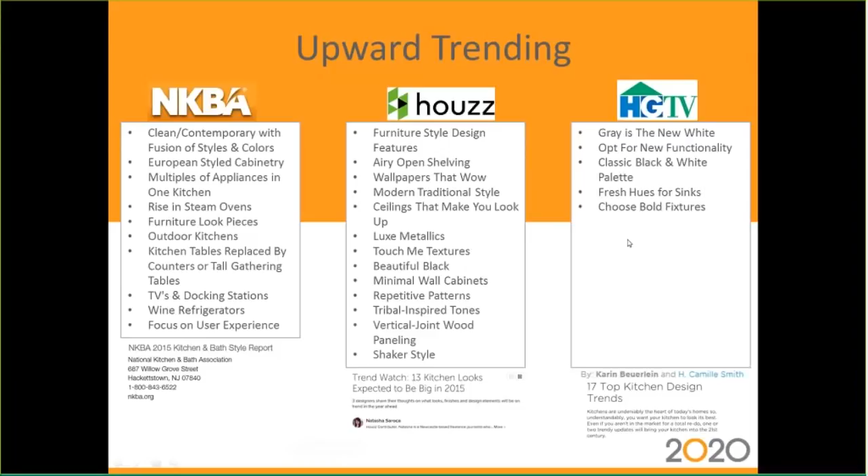Choose bold fixtures, contrasting light and shadow — we're going to talk more about lighting later. Maximizing storage, again talking about inserts inside of cabinetry. Add in automation, and that could be automation from everything from a soft close or an automatic open to automation within your appliances. Again, appliances going to commercial grade, bigger, more commercial type of appliances.

Here's one of my favorites, quartz. When we go back to the NKBA survey, there's actually only one type of countertop even listed anymore in growth, and it's quartz. I mean, it's just blowing everything out when it comes to growth. Mixing countertops, wood, quartz, and so forth.

And then a couple of other flairs they have: timeless farmhouse flair, contemporary combo, which simply means a contemporary kitchen and maybe an old warehouse with a brick wall, having a flexible palette, and opting for architectural lines. We'll get into all of these later as we start to see what's alike within the trends.

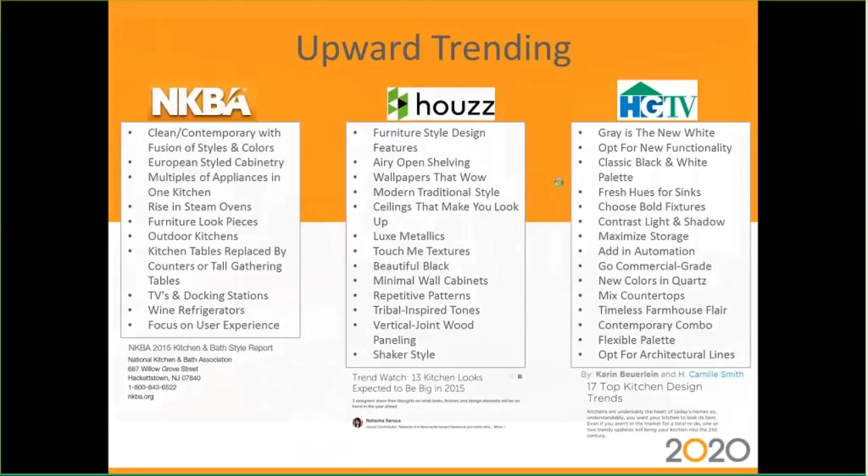So that's a great comparison of industry experts, a combination of industry experts and consumers, and what the consumers are actually seeing. So let's move on to the first topic, which I want to talk really about designing and selling with the trends. Now, when we move into designing and selling with the trends, let's take a look at what's alike within our surveys. So the first thing I want to focus on is colors.

Here's Houzz: black is beautiful. Tribal-inspired tones — and you'll see the earth tone that I was talking about just a moment ago behind our very contemporary white kitchen.

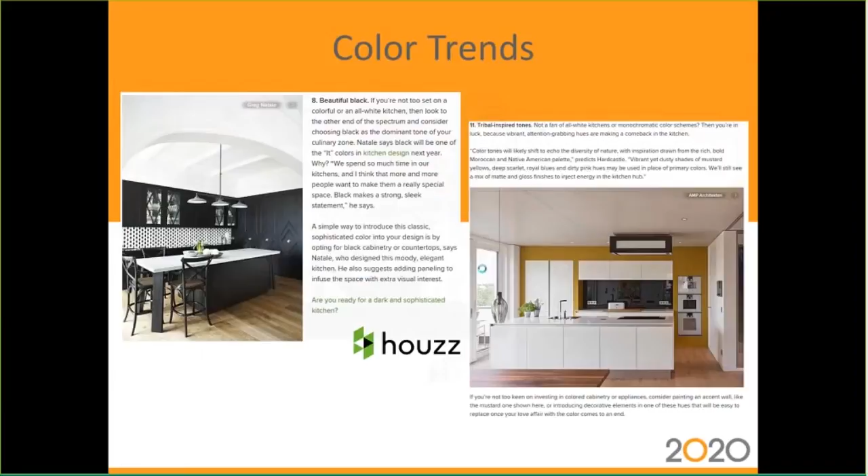Even if you take a look at HGTV, what are they talking about? Gray is the new white, and classic black and white palettes. Well, how do we show that to our client? Because our client is seeing this, we're recommending it. How do we actually demonstrate that? Let me show you a couple ways to do this that are pretty interesting today.

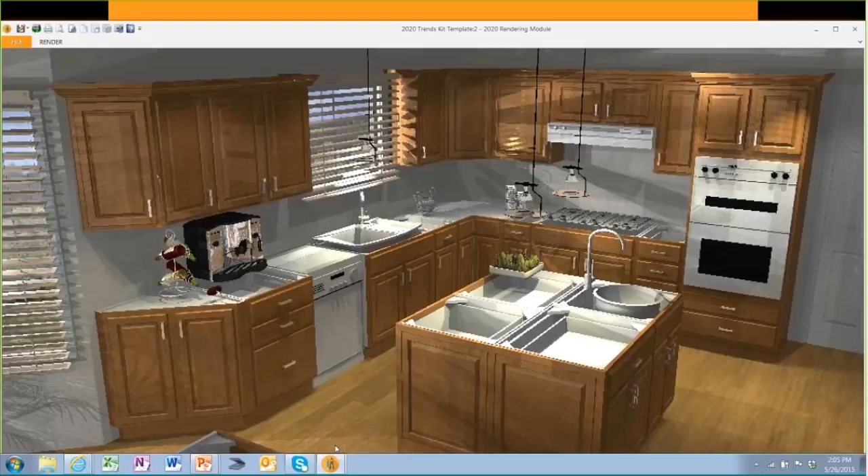Number one, I have a kitchen. It's a very, very traditional looking kitchen right now, as you'll see. It's starting to render, going through the steps. Usually it takes about 20 seconds to fully render this. But I want you to notice it's just a plain old cherry with a medium stain. This could be anybody's 1995 kitchen.

So let me flip up here. Let's go into my plan, and let's talk a little bit about some of the capabilities that we have today. First of all, let's say that our manufacturer uses Sherwin-Williams, and we want to paint the kitchen a Sherwin-Williams gray.

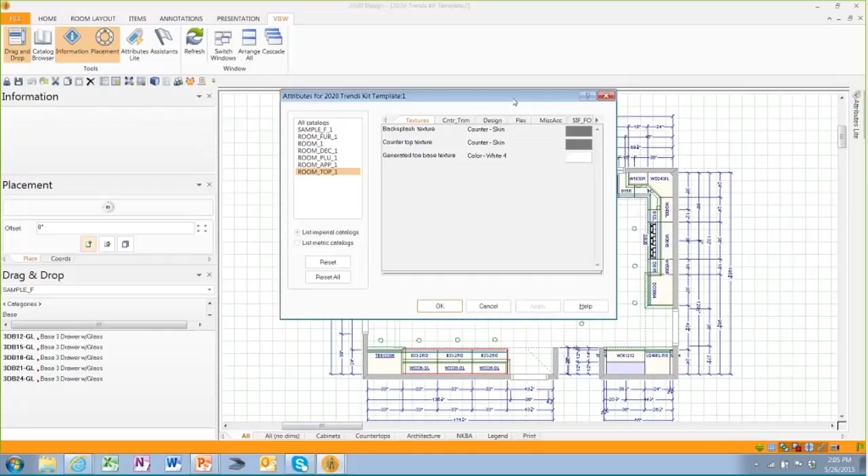All we have to do today is right-click on the plan and go to what's called Global Attributes. Now, what you're watching right now—we may have 2020 users online with us, we may have non-2020 users. All are welcome, we're trying to provide trends to the entire community. For those of you that are 2020 users, I am using V11, the latest update. For those of you that are not 2020 users, just follow along with me and you'll see the capabilities and maybe some items that can help you in your business.

So once I enter into the global attributes, which means change everything, I'm going to go into Sample F Catalog, which is the cabinet manufacturer I happen to use, and pick one of the wood tones—let's just say the molding texture. When I click on that texture, you'll see it'll give me my molding texture, and it's wood. If I scroll up in my list, I'll come back and say let's use paint instead. I'd like to use Sherwin-Williams, and I'd like to use a cool neutral, because whites and grays and so forth are really popular.

We have Sherwin-Williams, agreeable gray, amazing gray, analytical gray. I can change further down in the alphabet and choose cyberspace, as black, or Chelsea gray, or whatever it's going to be. I'm going to come up here.

There's one that I like to use, which is aloof gray. I'm going to click on aloof gray, and let me, for you 2020 users, teach you a little trick. When I want to change multiple items to be the same color, I simply highlight the color code at the bottom, and on my keyboard hit Control-C. That copies everything. I'm going to paste that into some other areas in just a moment.

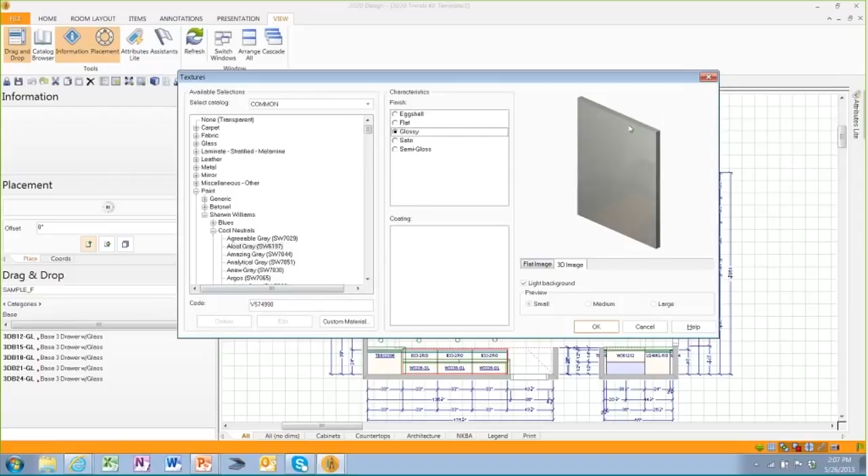So when we really do move into those modern colors—you are working on a slab door, it is a Ferrari red color, and you need it to be glossy. That's the downtown kitchen you're working on right now. You can click on glossy, and it will be really glossy. It will actually reflect everything else in the room just like it would in real life.

Now, I'm not quite going that modern, so I'm just going to go back to flat gray. We'll go ahead and click OK, aloof gray, and you'll see that this has changed to aloof gray.

If I want to take my other wood tones and make them aloof gray, all I do is highlight them and hit Control-C, and that becomes aloof gray. Let me do that again—I did the wrong thing. Let me go back up here and get my paint again. I said Control-C, but I meant to hit Control-V, so just bear with me one second.

We'll go back into Sherwin-Williams, back into our cool colors, aloof gray, and I will copy that one. There we go, and now I'm back on track. So we'll go back in here, and I'll say Control-V, which is paste. And then I'll choose Control-V again, which is paste.

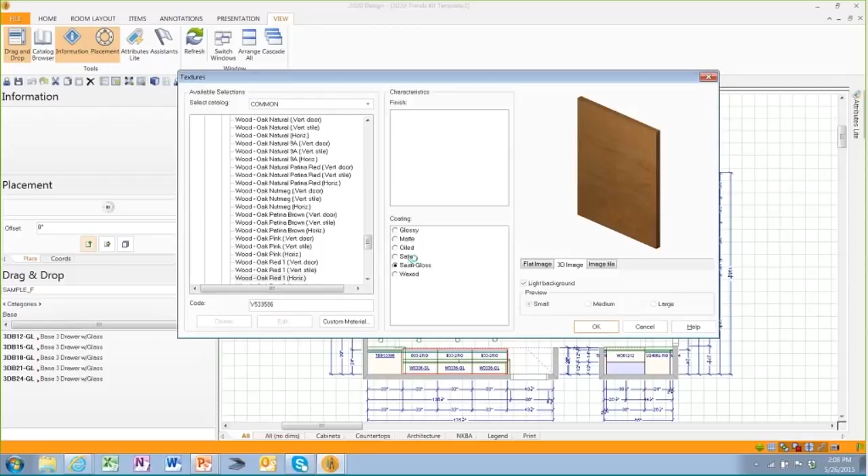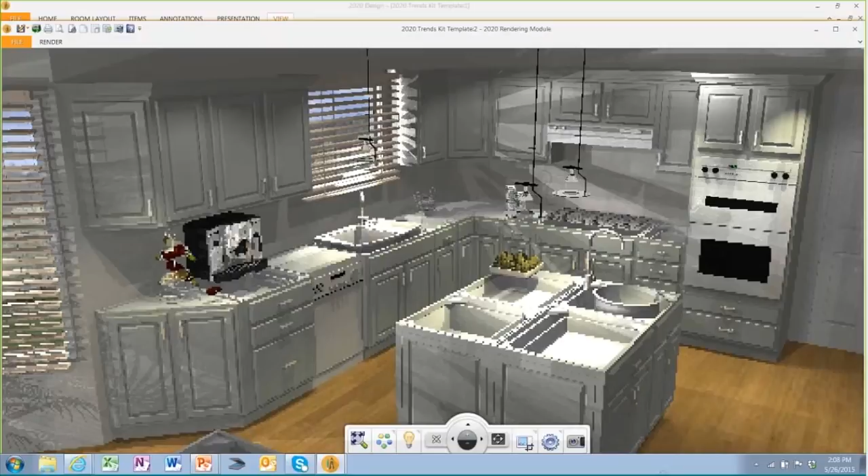One more time, I'll hit Control-V to paste. Now let's take a look at our kitchen. Remember that 1995 cherry mid-tone kitchen I showed you a moment ago? As it starts to draw, it's now gray - and not just gray, it's Sherwin-Williams Aloof Gray.

As I scroll in close, let's look over top of my artichokes. I'll highlight this one area and watch as it changes and paints my kitchen. By the way, you might notice I have levitating artichokes and a sink hovering above where my countertop should be. We'll place countertops in a little while, so just be aware they're purposely levitating right now.

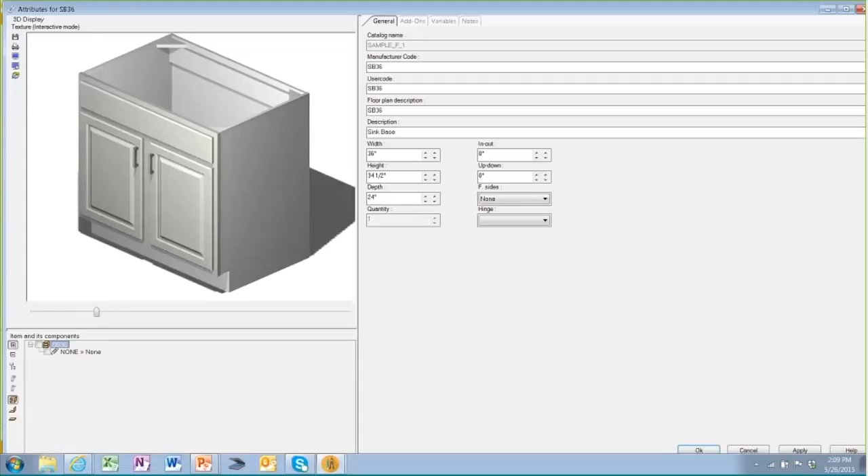So there's my Aloof Gray. Let's say you wanted to incorporate black - remember we said black is one of the fastest growing colors? I can zoom in here and say, let's take this sink base 36. We'll double click on it, and I don't want the sink base to be gray - I want it to be Black Magic, a color by Sherwin-Williams.

I'll go into variables and click on texture - and when I click on texture, I hit the wrong button. We'll hit texture, I'll say door texture. I'd like this to be... give me just a second, I can hear my speaker is on, let's silence that so you don't hear the beep.

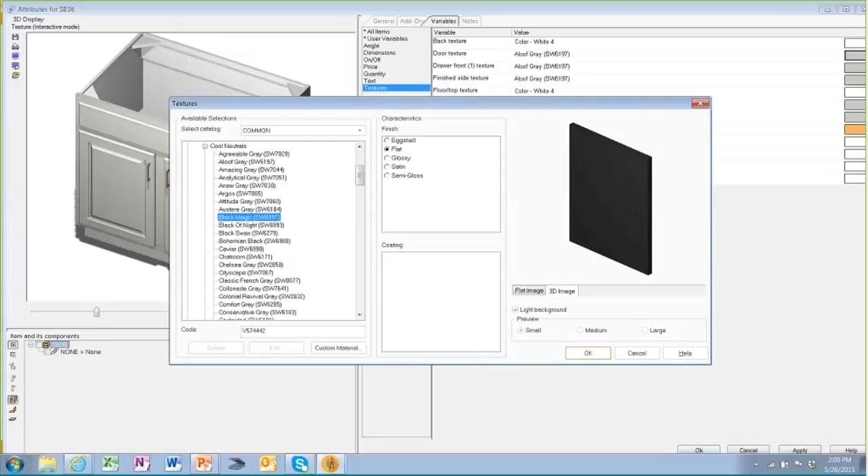So we'll come down here, say Black Magic, click OK. I can go through and pick the next one and say I want that to be Black Magic too. Again, for the shortcut, I just highlight it, hit Control-C to copy. We'll come back down and choose the last one, highlight the color code, hit Control-V which takes me right to Black Magic, and click OK. Maybe I even want to make the end panels Black Magic.

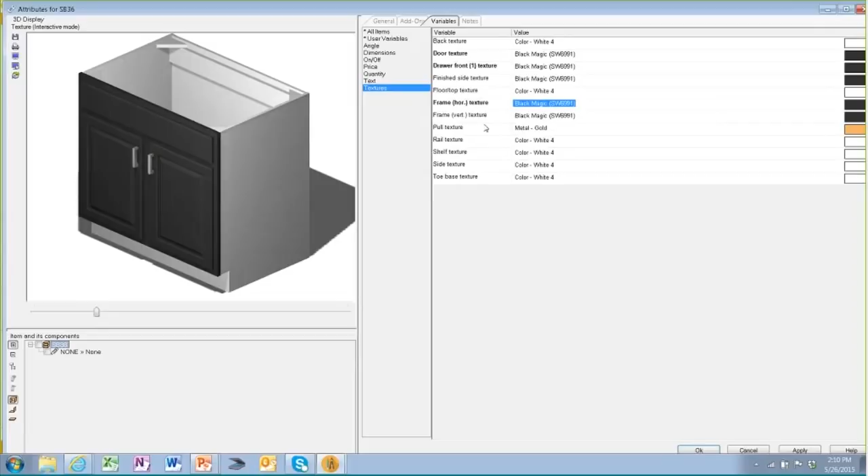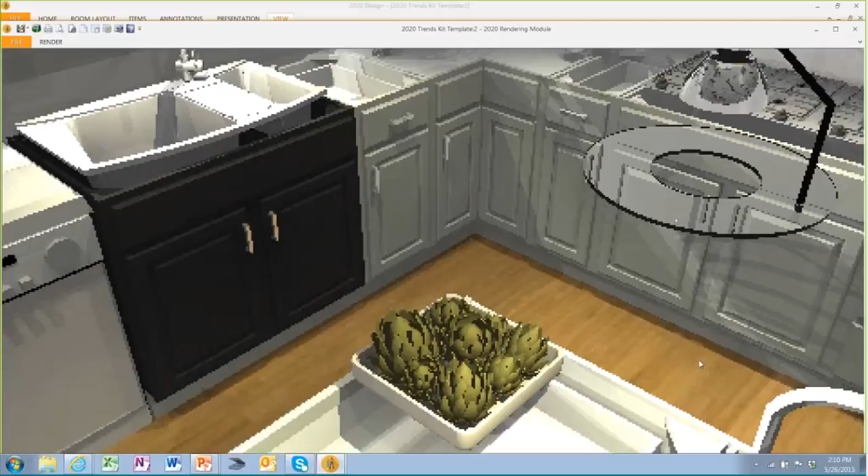So I'll go to the end panel, which is just a flat white color right now. I'll go up here and make that black too - it's right next to my dishwasher, so I'd like a black panel there. We'll click OK. If we take a look one more time, you'll see I have an Aloof Gray kitchen with a Black Magic sink base. All of these colors are based in Sherwin-Williams.

Now let's come back out of here and change - I want to go to our next feature in our trends, and I'm doing that a little quicker. We'll come back and look at that cabinet in just a moment. I want to run through things because we have a lot to talk about this afternoon.

Let's talk about the next set of trends that are alike: focus on the user experience, opting for new functionality, maximizing storage. When you look at this, you'll see how important storage and accessories are in a room in all the surveys. That's becoming bigger and bigger every year, not just traditional, but more modern looking.

I'm going to give you a few examples of all of these and how you can demonstrate them to your client. When your client comes to you, they have ideas of what they think they need, but we're the experts. It's important for us to share what the trends are, what our recommendations are, and help the client - who has a billion ideas they've researched - focus on the few items that will actually make them happy with their project at the end of the day. That's what we're there for.

So I'm going to show you some items where we can demonstrate and show clients what the utensils and storage items will look like in their kitchen. If we come back to my plan live, we'll go back into my 2020 - I've left this open. Before we do anything else, I'm going to double click on this base 15 because I want to give you a before picture.

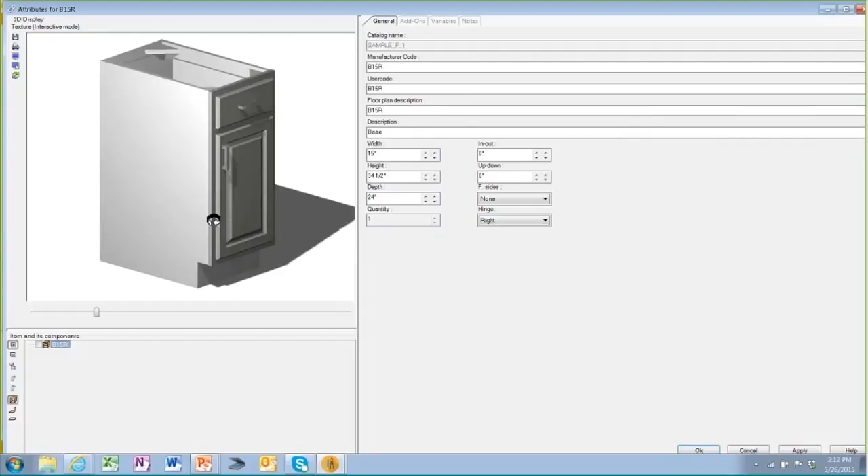I have a base 15 that is Aloof Gray - it's a base 15 hinged right. If I went to variables and the angle button, I could open this door up, and you'll see that the door is hinged right.

We'll cancel that. I'm going to go back now and change my catalog - right here is where we find our catalogs. You'll notice in my 2020, not only do I have generic catalogs, like the generic cabinet catalog I was just using, but I also have tons of brand-specific catalogs too.

If I scroll all the way to the bottom, you'll see that I have Rev-A-Shelf and Richelieu. If I choose Rev-A-Shelf and say I'd like to add an accessory to that cabinet, I'd like to add a wastebasket. We'll choose wastebasket. I'm just going to take a standard 5149 series.

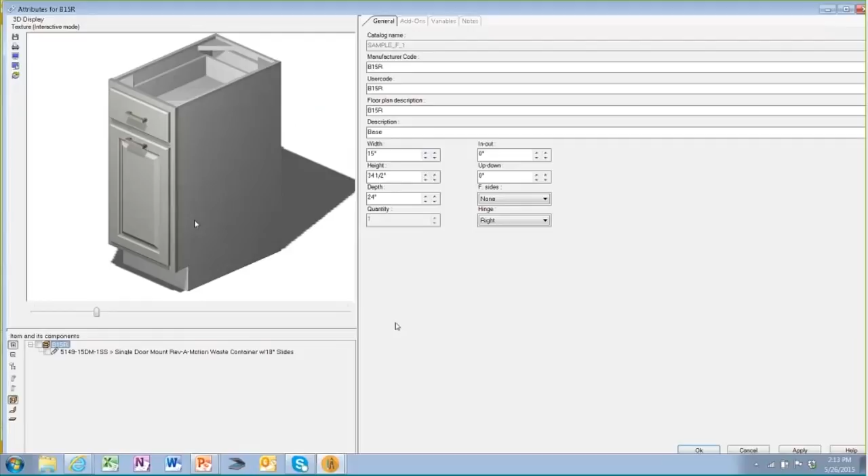I'm using their nomenclature. I want one with a door and a drawer, so I'll double click on it. Let's scroll down and find one for a 15-inch item. I'm going to click on this, drag it over, and simply drop it on top of that cabinet. Now, once I dropped it on top of the cabinet, watch what happens when I go to the base cabinet. Looks the same, doesn't it? No different, except there is one difference: the door is no longer hinged.

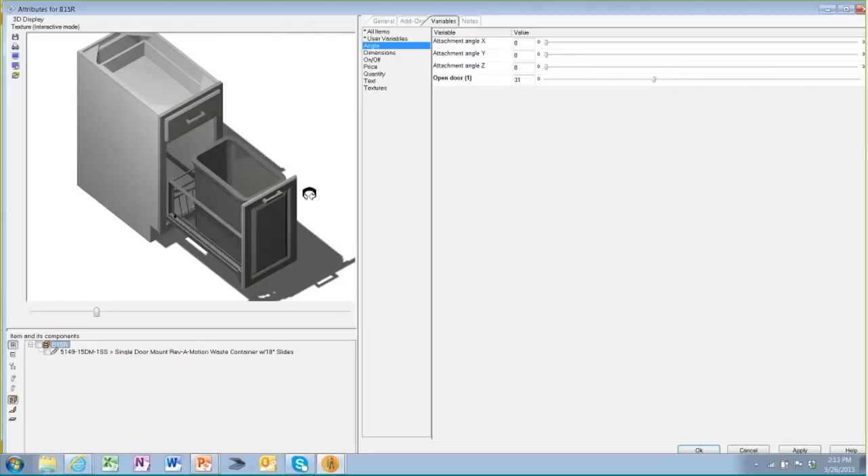It's a pull-out door. I'm going to go to variables, go to angle, and open that door. Now there's a wastebasket in it. It's not just any wastebasket - it is a Rev-A-Shelf 5149-15DM-1SS. It's a real product. I'm going to go ahead and click OK.

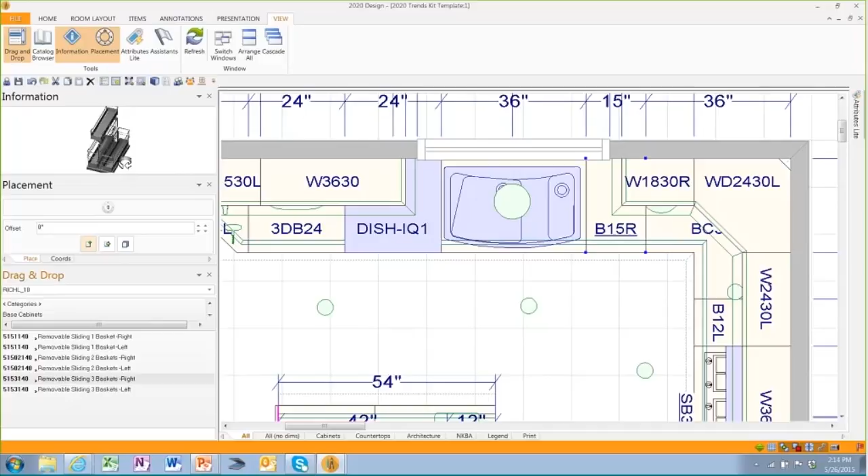Let's do the same thing with the sink. Except this time, instead of putting a Rev-A-Shelf wastebasket, let's go to a different catalog - let's go to a Richelieu catalog. In this case, I'm going to choose something here for base cabinets. I'm going to choose a Portero system. If I click on this, let's say we put it on the right. If you look, here's what the Portero system looks like in my upper left-hand corner. I am going to take that, and I'm going to drag it and drop it inside of the cabinet.

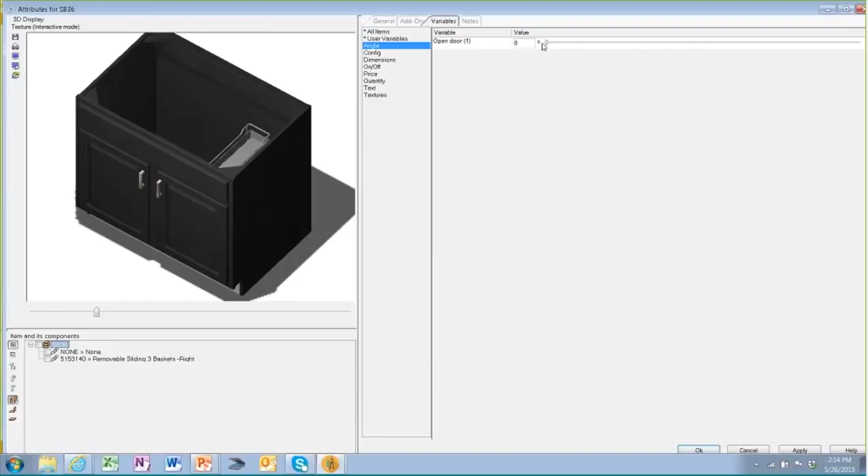It says it's different from the catalog I'm already using. That's okay, I knew that. I'm going to double-click on this cabinet now. If I tilt this and look inside, guess what I have - Portero insert. If I wanted to open the door, all I need to do now is go into my angle. I'm going to slide the door all the way over, where I could have just typed in 90 right here. I can click OK. If we go back and take a quick look, just above my artichokes, you'll notice that I have a nice Portero pull-out in my sink base, and I have a wastebasket pulled out as well.

Now, as I let this go for a minute, I want you to pay attention to my rendering. If you look real close, especially on the right-hand side - I don't want to move my mouse right now because it'll stop my rendering - there's like a little round circle on the far right-hand side. That's actually a light that I'm looking through right now, a hanging light in my ceiling. You'll notice there are some little jagged edges on it.

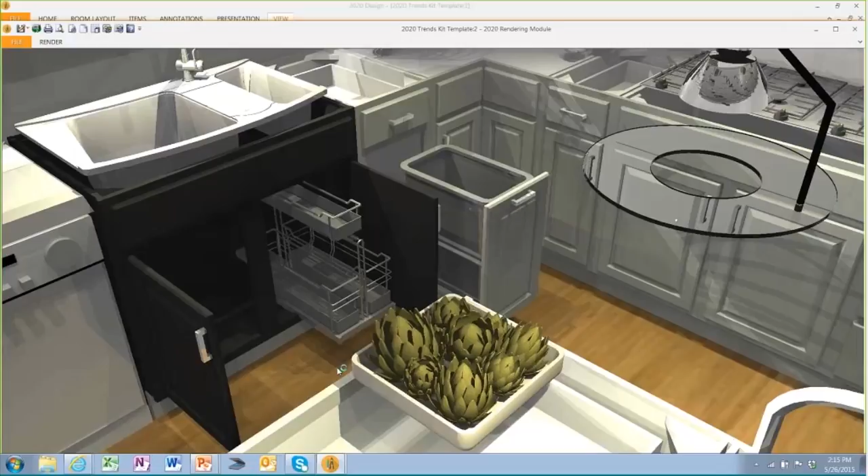When I first start to render like that, it gives me a decent rendering, but if you let it sit for 15 or 20 seconds, you might notice all the lines go from being a little jagged to being straight. It actually re-renders this 5 times before it's done. It will go from putting indirect lighting to direct lighting, to what we call at the very end anti-aliasing, which is basically a fancy term for making the crooked line straight. Within that short amount of time, you could have either been working or you end up with a high-resolution photorealistic rendering. Now, I'm working at a medium mode, but you can always go to a higher mode than that.

Let's pop back over to our trends again, and let's see what's next on our trend list: furniture style. Now, this is really hot - something that actually appeals to me, especially in vanities and islands. I really like the furniture look of putting legs, whether it's legs that attach to the side of the cabinet, more like posts like an H leg would be, or really furniture-type feet. It's something that really appeals to me personally, and I'm really happy to see how high it ranks in appeal within our professional list too. Here's a great example of a furniture-style vanity that's being used as an island.

Let's talk a little bit about how we can present that to our client. Again, our role is to help guide our client to what's going to make them happiest at the end of their kitchen, giving them good advice and so forth. A lot of times, showing is believing, and it's real important to set that expectation up front. Because even though we might know what it's going to look like with furniture legs on it, maybe our client has a different opinion.

I'll talk a little bit more about that in lighting, about setting expectations. But that's what's so important about showing them what they're really going to get.

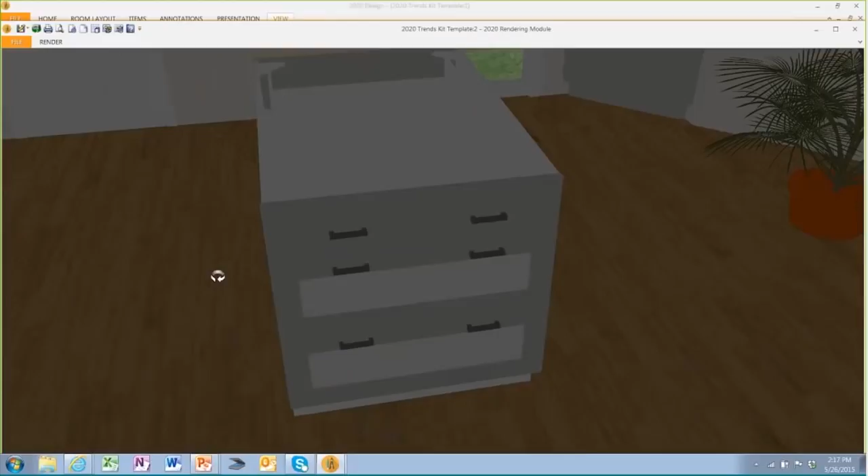Now let's take a quick look at this. Let me change my view. Let's turn around in our kitchen, and I have a little bit of an island here. Not a fancy island, I just put 2 drawer base 33s back to back, and I want you to notice that they have toe kicks.

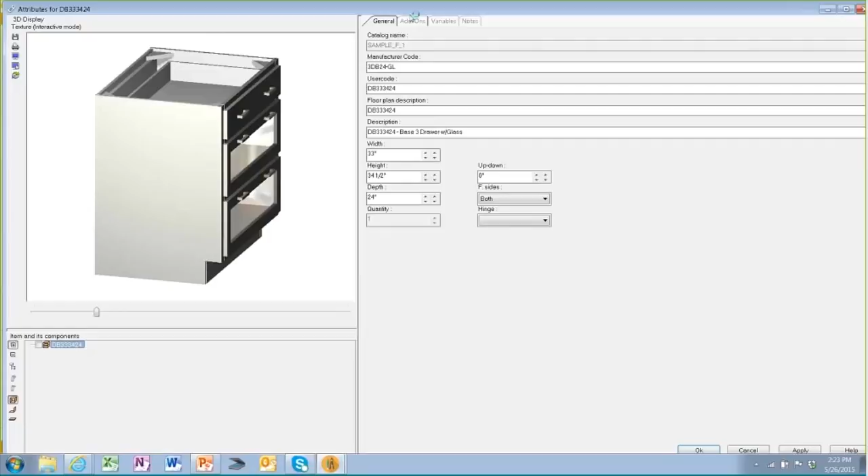I'm going to go to our floor plan and make a quick change. If I'm going to put furniture legs on these cabinets, the first thing I need to do is remove that toe kick. So notice, I double-clicked on the cabinet, I'll go in and choose add-ons, go to base modifications, and say no toe. Toe kick's gone. I can do the same thing on the other cabinet.

Double-click on it, we'll open it back up. There it is, no toe kick. I'll say let's turn the toe kick off. I'm sorry, there is a toe kick. We're going to turn the toe kick off, and you'll see no toe kick.

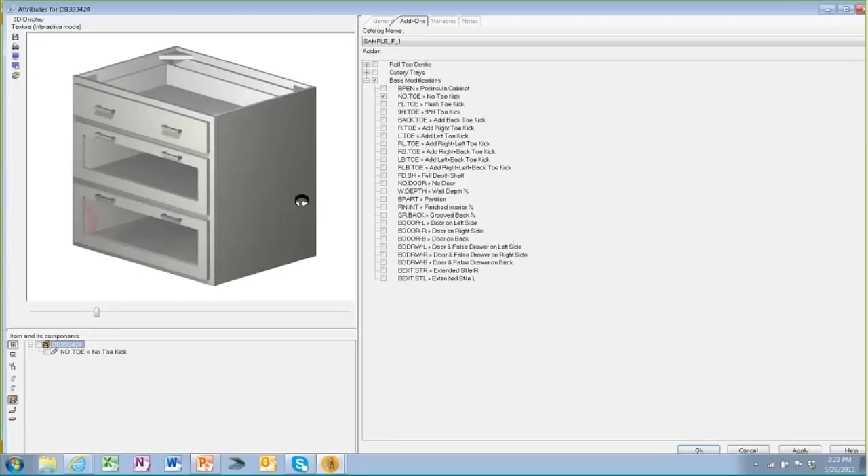I did have a question come in before asking about modifying the cabinets. Can you remove toes? You can, but keep in mind you can only do that in a catalog from a manufacturer where the manufacturer has that as an option. If it's not an option from the manufacturer, you won't be able to do it from their catalog. But don't worry, if you're going to custom build something in the field, you can do it through our generic catalogs. You can always mix the catalogs together.

Now, speaking of mixing catalogs together, let's change our catalog. I'm going to come up here to the Art for Everyday catalog, where I could choose Adams Woodworking, but let's use the Art for Everyday catalog.

You'll notice I use a lot of catalogs, and I do because the majority of companies in the kitchen and bath industry know most people are using 2020. So if they want to push their product out into the field, they create 2020 catalogs. Art for Everyday has a great catalog from corbels to moldings, mantles, corner posts, Queen Anne legs, bases, legs and posts.

I'm going to jump down to the bun feet area, and if I just click on it, you'll see a preview of the feet. I'll click on them, keep scrolling down, and you'll see lots of different feet available. I'm going to choose the 4.5 though.

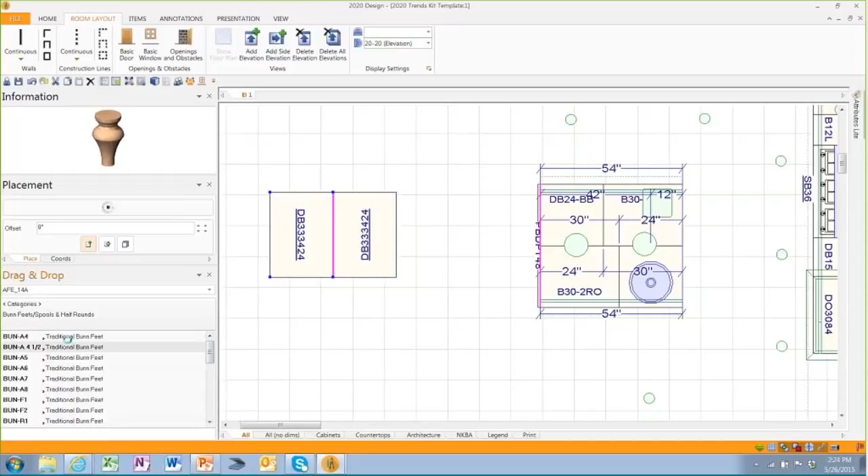Let me tell you how I'm going to place this. I'm going to drop this, and as a quick time saver when placing feet underneath a cabinet, because there's a barrier right here, I simply hold the Control and Shift key down on the keyboard at the same time, then drag the foot to exactly where I want it to be.

Let's say we go get another one, drag it over, drag and drop, snap it into place. Now you'll see I'm not being exact right now because we have limited time together this afternoon, so I have a lot of things to show you. I'm just manually guessing just about where they need to be, but I think I'm doing a pretty good job at it.

I'm going to do one more foot here at the top, and the reason is because you can see it from my angle, but I'm not going to put all the feet in. Let's go ahead and take a quick look at this.

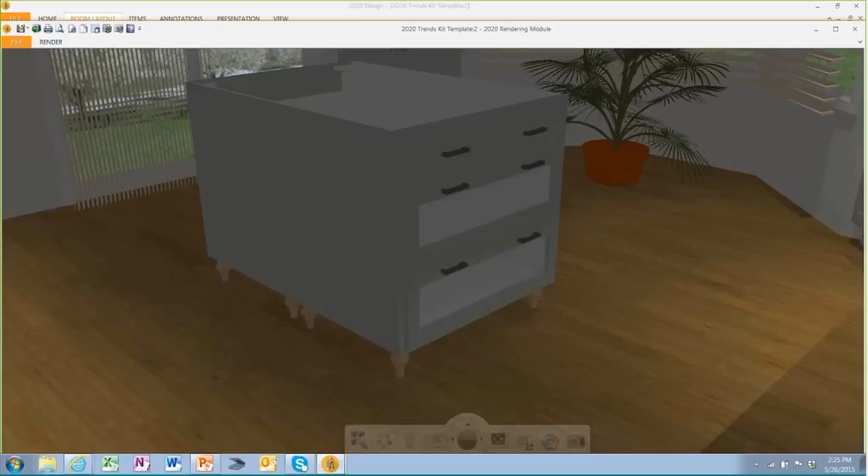Now as you see this, we're starting to design our kitchen, starting our layout. There we go, give it a second. You'll see that I have added feet to my drawing. Matter of fact, if I wanted to, I could stand down here on the floor and see what my little puppy would see just before he crawls underneath here and gets stuck and begs for me to get him out of there. So you can see underneath of the items as well. That's the type of detail we have when you're designing.

One of the nice things when working with clients is not just showing them the trends, but the ease of which you can move around the room. I'm a big believer that when working with a client, you need to constantly move around the room and show them different areas.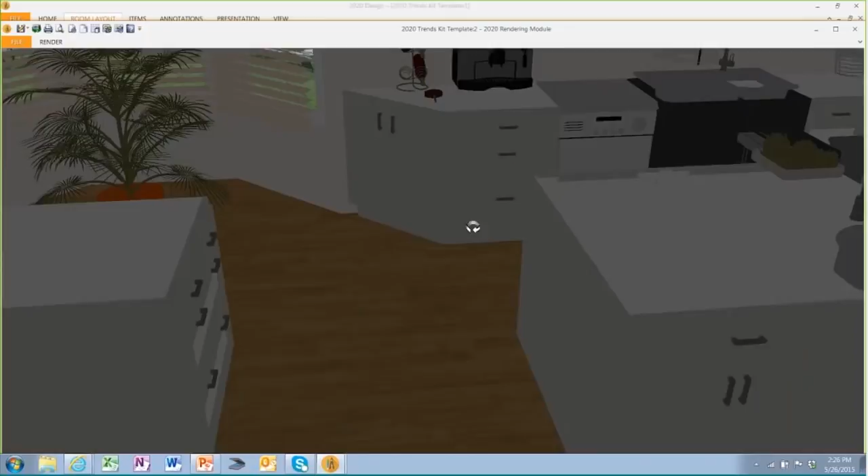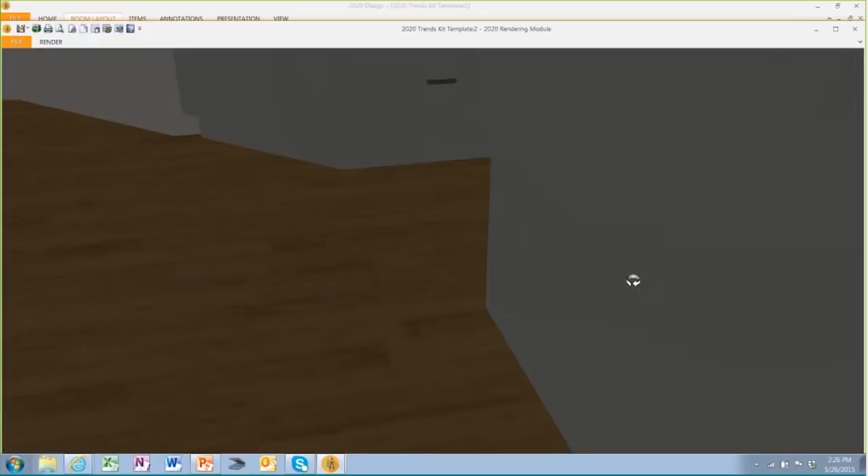For instance, I might have had a raised panel on the end of this island, which I think I did before. But if I shift and move in just a little bit, I can show my client that there isn't a raised panel on the island. We need to point things out like that because they might say, well, you know what, we want raised panels on everything all around the room. The fact that you can move so quickly around the room allows you to demonstrate what you need to your client.

Let's go ahead and go back to our trends. Give me just one second. We'll jump into the next slide. Let's see what the next trend is.

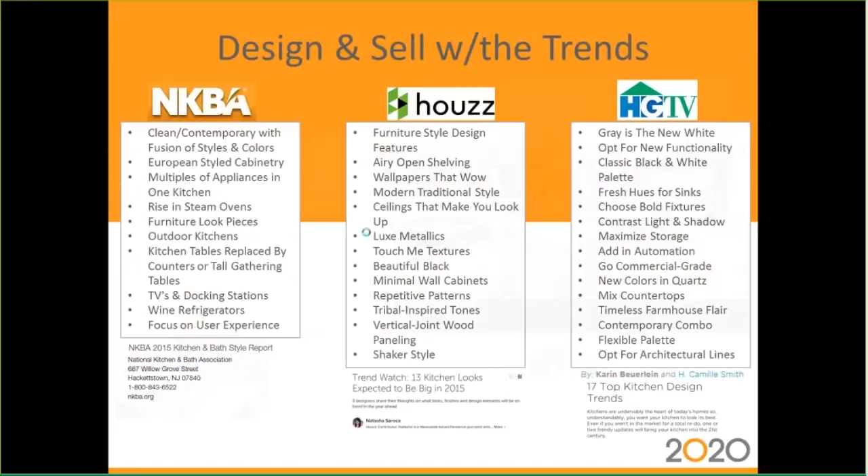Let's jump back over to our 2020 and let's talk a little bit about how we would demonstrate countertops to our client. Let me make an adjustment to our view again. So we're going to move up a little. I'm actually going to turn and look back into the room. So let's make a quick adjustment. We're just going to look at it from this angle for right now.

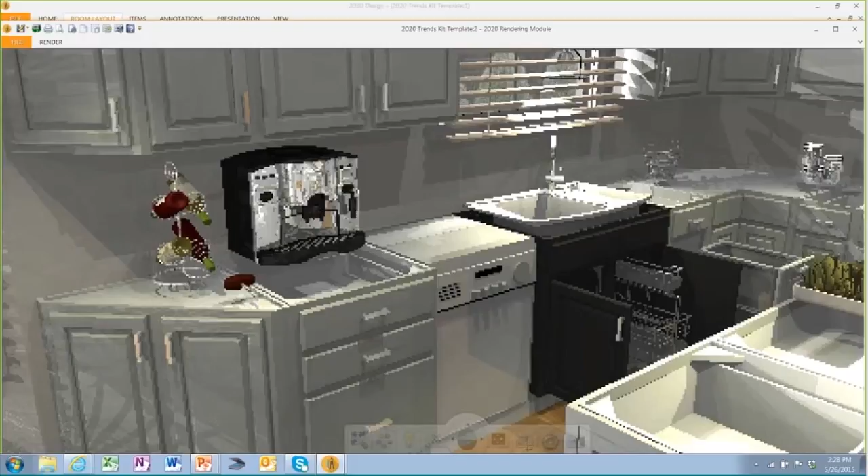Okay, so I have no countertop. We're going to add a countertop. Not just any countertop, we're going to add quartz surfaces because we want to be able to demonstrate what that quartz surface, or if we mix countertops together, what they're going to look like for our client. At the top of the screen under Items is a function or feature called Countertop Wizard.

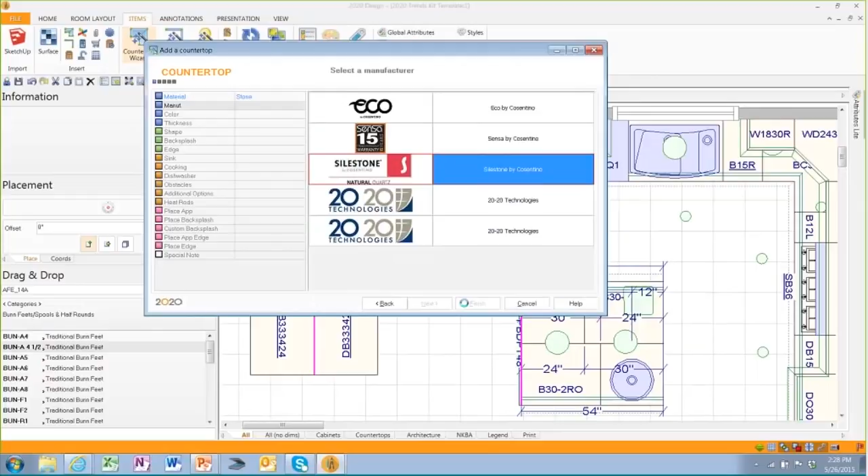If you click on Countertop Wizard, it gives you lots of selections. But the first selection is stone. And if I click on Next, you'll see a list of all of our options. Silestone is listed here. Let me click that as my example for quartz. Now, when I click on Silestone, it's going to open up the catalog, and it's going to give me a list of the textures that are available.

So you'll see Alpino White, Altaire, Arden Blue, Atlantis, Bamboo. They're in alphabetical order. I can go all the way down to the bottom, Zionite, Xerix, and so forth. But for today, I'm going to choose Artic. There's my example of Artic.

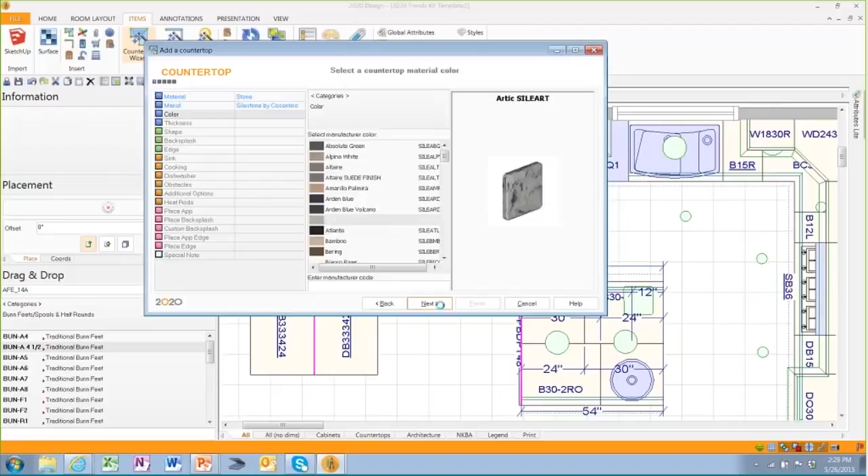If I click on Next, it's going to ask, do you want it to be 2 cm or 3 cm? Now, 2 cm has become very popular in thickness. Matter of fact, a lot of people have actually gone to half inch material on quartz countertops, and they're using that for surrounds in their tubs and bath areas. But I'm going to go ahead and choose the thicker one. I'm going to choose 3 cm right now for my countertop.

And it's going to ask if I want to design it over my existing kitchen, which I do. So you'll see my existing kitchen. I do have one more wall down here, but I've already put a wood natural cherry countertop down there. And that's a great example of one of the popular things. I think it was in the Houzz report, or it was the HGTV report, which talks about mixing materials on your countertops.

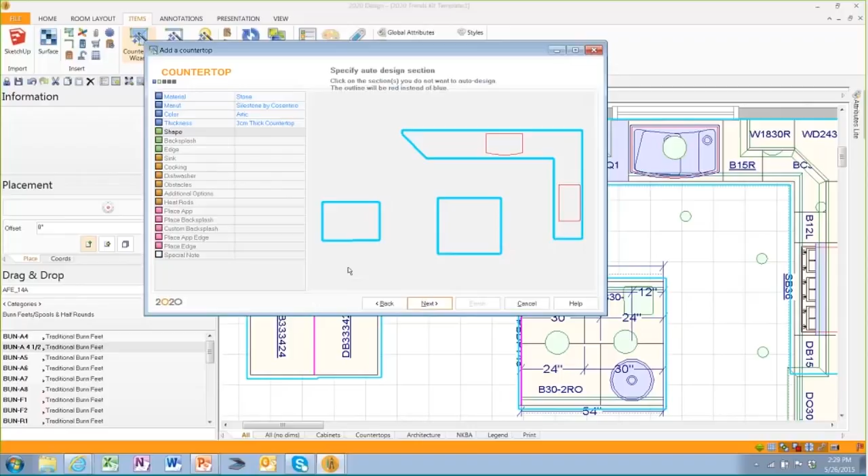Now, we're going to go through next and say no backsplash. Then it's going to ask me a couple of other questions. What type of edge do you want to use? I'm going to say I want to use a half bullnose, or I might use an eased edge. I actually never use a full bullnose just because of the water running down, wrapping around, and dripping down on the top of my beautiful gray painted cabinets. I don't want to destroy the finish on those cabinets, so I want to have a nice clean edge at the bottom.

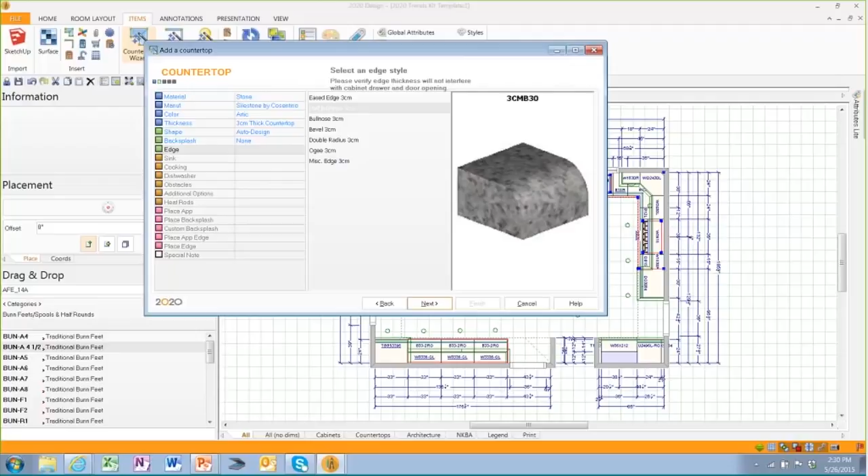Next, we're going to go in and define our sinks. I've put a sink in the main window area and also one on our island. So I'll click Edit, and choose a drop-in sink.

And then we will do the same thing for the bar sink. I'm going to edit this, and say drop-in, and let's just make it standard.

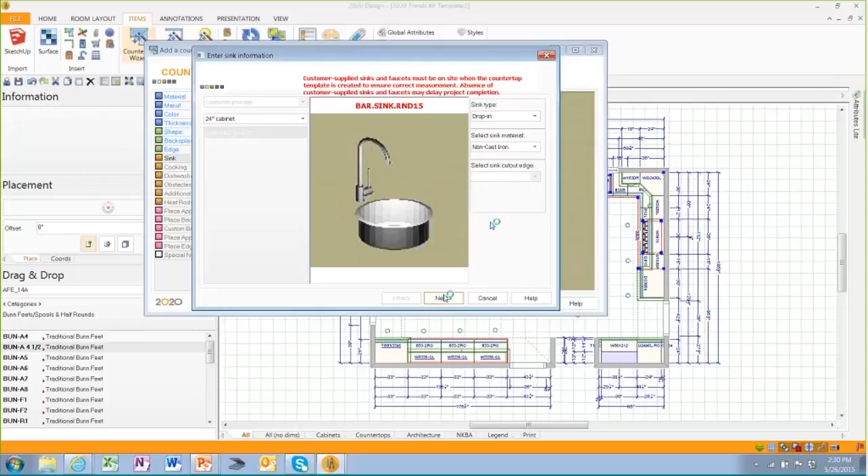We'll click Next. There's a couple of other questions it's going to ask that I'll run through quickly. We can simply say Next to whether there's any other appliances, since I already have them placed. Are there any obstacles in the room? I'm going to say no. Do I need to do any additional cutouts for electrical or such? No, I'm good. Do I need to place edging for my appliance? It already indicates where the appliance edge should be.

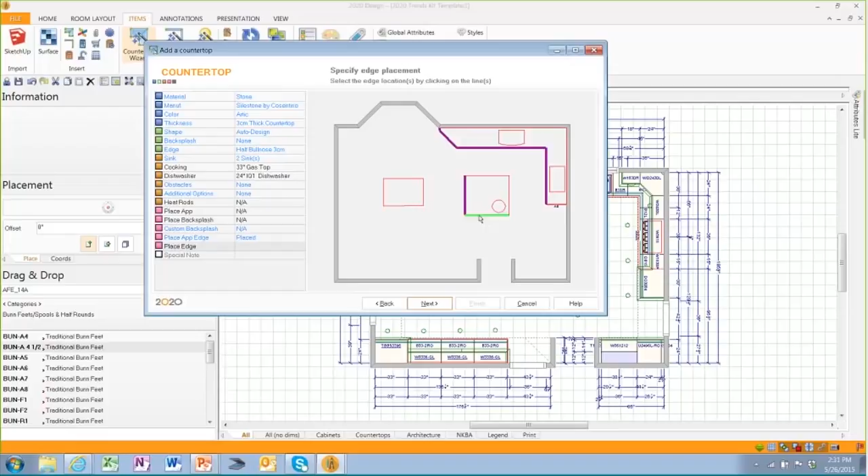Where do I want to place my regular counter edge? All I have to do is go around the room, click, click, click. I'll just go ahead and do this one as well. And then we'll click Next again. It wants to know if there's any special notes. I'm good. I'm going to hit Finish.

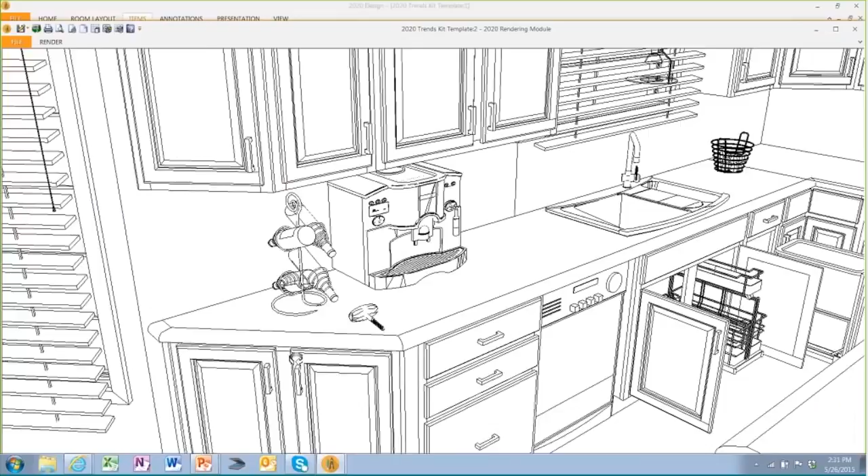And if we go back and take a quick look at our countertop, there's our countertop. Now watch it render this countertop. Let me move over here a little bit more, and let's get a little closer look to the countertop. We'll just adjust that just like that. We'll give it a second to render.

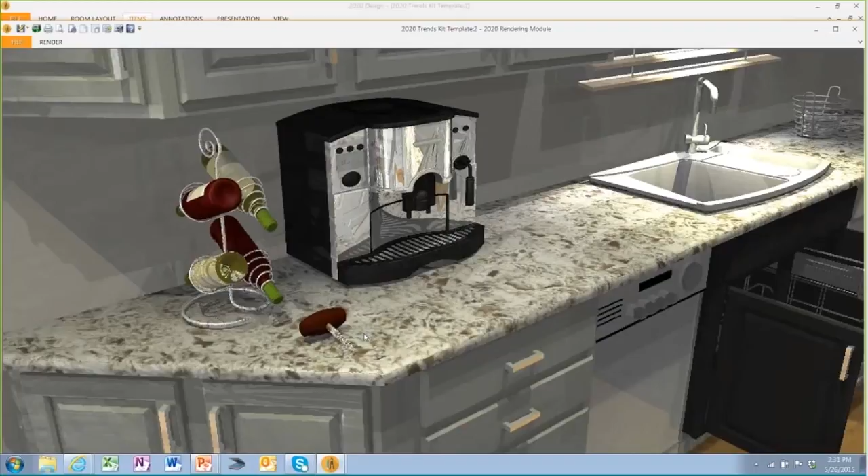Now remember my original kitchen? I started not that long ago with like a 1995 square raised cherry with a mid-tone finish on it, with no countertop or such. Now I have a Sherwin-Williams Aloof Gray with a Black Magic sink base with a beautiful pull-out in the sink base, as well as a Rev-A-Shelf wastebasket and this lovely Arctic Quartz Cosentino countertop.

It's all pretty easy. Now, I have a couple of questions. I'm going to group some questions together. A couple of questions have come in about catalogs. Where am I getting these catalogs? I assume your question is where am I finding them to download. But just in case, let me take both questions, either direction.

So drag and drop. When I click on the arrow here, this will show me all the catalogs that I have on my computer, everything from the accessories at the bottom to cabinet catalogs if I scroll up. There's Kohler's catalog, Miele, KitchenAid, and so forth for my appliance catalogs. That's one thing that you may be asking.

What you're probably asking me is where am I downloading these catalogs from? Well, there's two places. Again, because 2020 is by far the most used software in the industry, most manufacturers try to create data catalogs because they want their products spec'd and sold in that design community. So if you want to download one of these catalogs, you can either go to the manufacturer's website. Like if I go to Rev-A-Shelf's website, they will have a 2020 catalog for you to download. Or you can always go to what's called 2020.net.

Now, 2020.net is for 2020 users only. If you've never been to it before, you simply come here, put your email address in, and you can create a login. You need your KDCU number from your 2020. But once you log in, it will list the catalogs. You'll be able to find your Rev-A-Shelf catalog, your Art for Everyday catalog, your appliance catalogs, your Cosentino Quartz catalog.

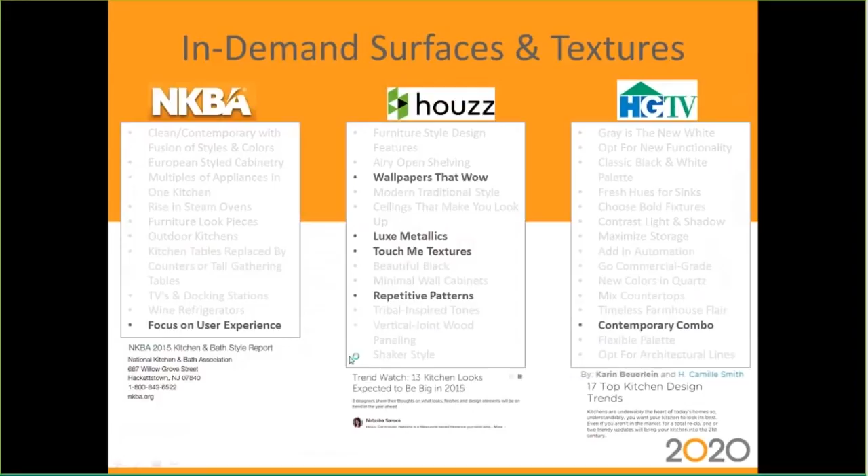Now, let's go back over to our PowerPoint again, and let's talk about the next item in trends. This is what I call in-demand surfaces and textures. When you look at the results from NKBA, Houzz, and HGTV, a lot of it is on patterns and using tiling or wallpaper on a wall.

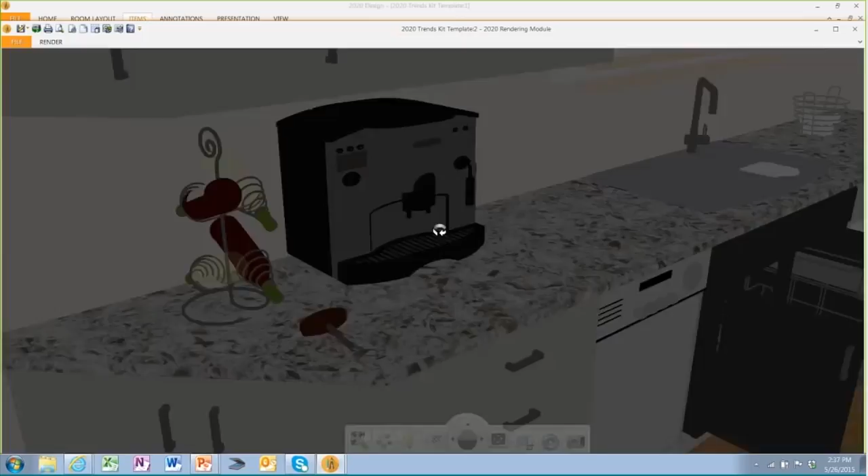Let me show you how you would utilize this trend with your clients. If we go back into our 2020 live, let me go back into my image. Let me turn here, and we're going to look at this wall here. This is where we're going to focus.

What we're going to do is go back into 2020 to talk about how to add textures. I'm going to double-click on the wall space on the right. When I double-click on that wall space, it opens up an elevation, which I'm going to drag down so it's in the middle of my screen. I'm going to zoom in a little bit.

There's a feature that some of you use, and I'm not going to ask for a poll on this one, but I bet less than half of you use it if you're a 2020 user. There's actually a feature called Surface. Surface allows you to draw or block in an area that you'd like to apply a surface. So I can say I'd like to apply a surface from here to here to here, and we'll wrap that up by finishing right where we started.

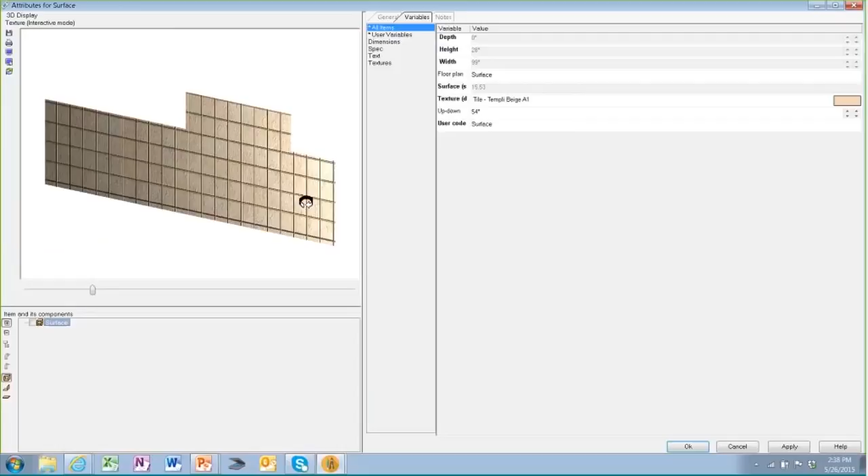Now when we finish, if we right-click, it'll come up and show us this lovely tile, which looks like it's from about 1980. Well, we're going to change that. As we've continued to evolve our kitchen based on trends and our clients' taste, we're going to change this.

We'll go in and click on the texture for this tile, and there's a preview of the tile. We have lots of generic tiles, but what I want you to see is there's no limit to what you can place there. If your client loved that wild wallpaper we just saw, all you need to do is go to the wallpaper company's website and capture a picture. They usually have thumbnail pictures of the different textures and wallpapers. Capture a picture of that and save it on your computer.

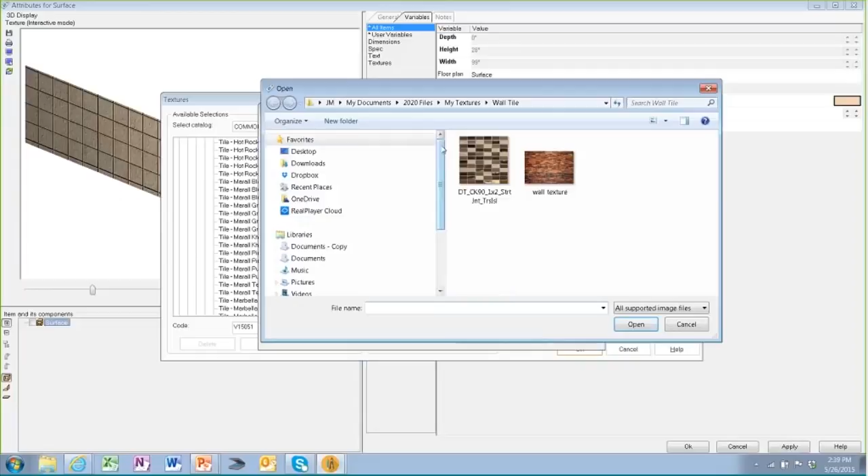I do that often. If we go to what's called custom material and I click on wizard, you'll notice that when I go in and make selections, I actually keep in my 2020 files a list of folders.

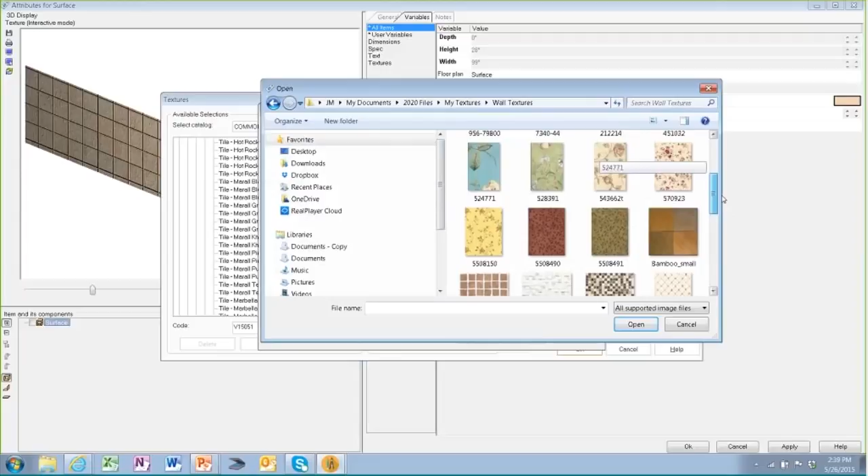I have folders for tiles, for products. I have a folder here called My Textures, which are door samples and flooring and stone walls and wall textures. So if I clicked on wall textures, these are all wallpapers that I have downloaded from something like wallpapers.com in the past. So let's say that your client wants this bamboo wallpaper.

I can click on it and click open. It says, do you want to rotate it? I'm going to say no. Do you want to crop it? I'm going to tell it no. Do you want to change the brightness? I will tell it no again. And I don't need a frame or to blend it.

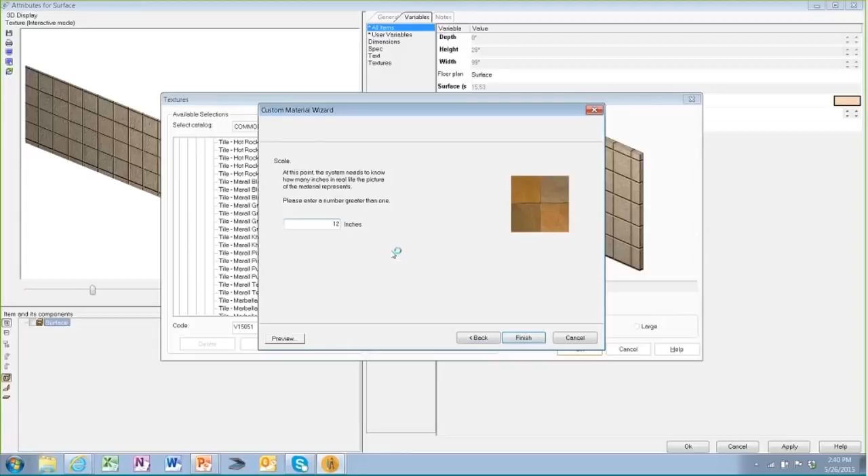You notice I'm just answering no to all the questions until I get to scale. I'm going to look at this and say, this is 6 inches, that is 6 inches. So my scale is a 12-inch by 12-inch block. When I click on Finish, and we take a look at this, you can even name it if you want and save it. There's my image.

There's my bamboo wallpaper. If I click OK and come back in here and take a look at this again, you'll see my aloof gray wall cabinets with my Arctic Cosentino countertop with my bamboo wallpaper.

Now, they don't exactly go together, but it's probably not as wild as that tribal goldenrod type of color that we had earlier in that white kitchen from, I think it was the Houzz, I think it was the HGTV report. Let's go back in here again.

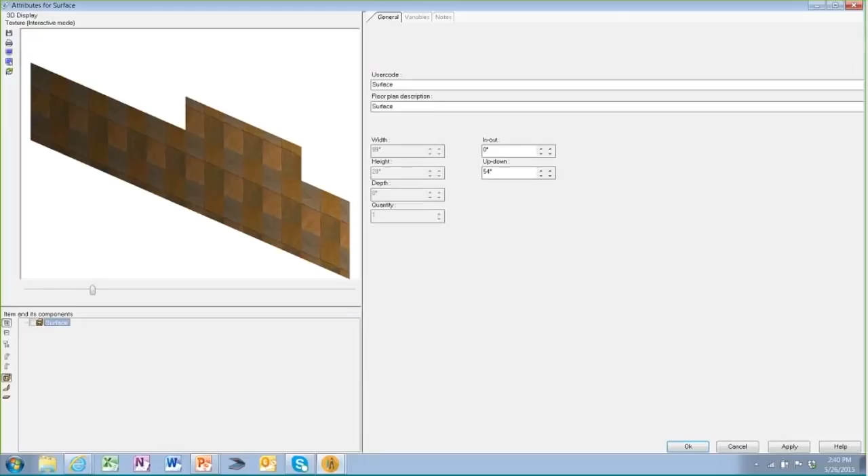Let's change that. Say, I don't like that. All I have to do is double click on it. I can go back to variables. I can click back on the texture. I can go back to custom materials and into wizard again. I'm going to tell it to go ahead and bring up another texture, but instead of choosing one of these wallpapers, maybe I'd like to place a tile, glass tile, which is what I would like to put as a backsplash. My textures. I'm going to go to wall tile.

Now, this image right here could be an image that I saved from a tile company's website. It could be an image that I saved from my camera. I took a JPEG image. So let's take the image.

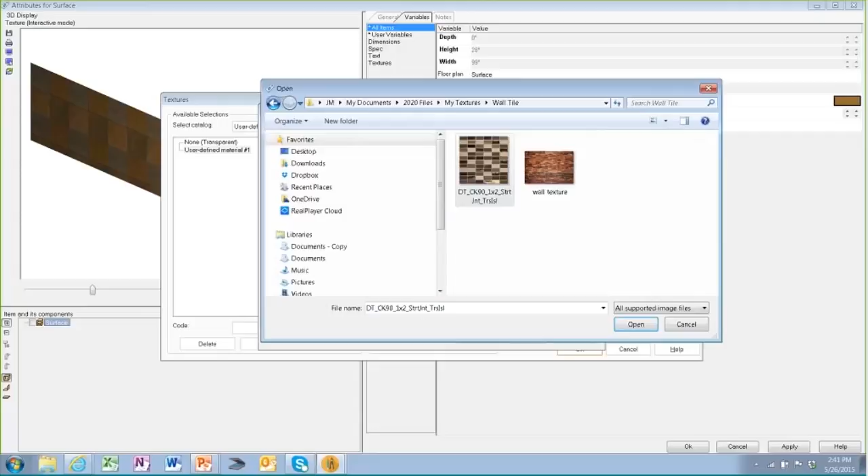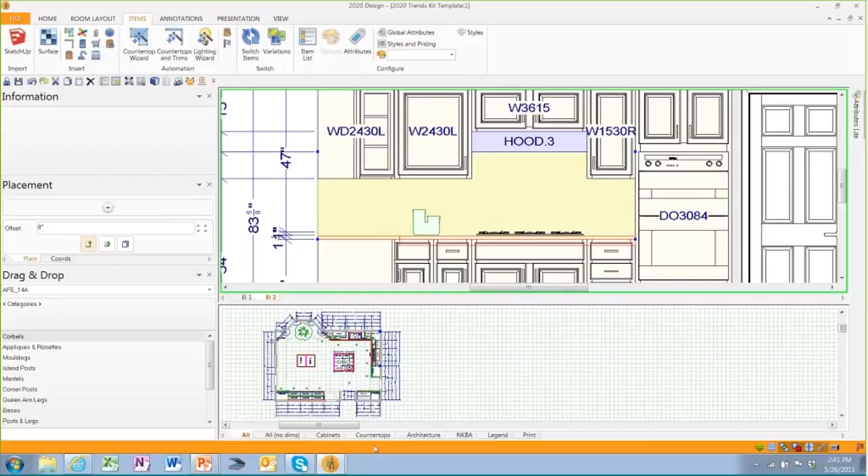We'll click Open. It says again, do you want to rotate it? No. Do you want to crop it? No. Do you want to change a frame or blend it? I'm going to say this is about 8 inches by 8 inches. We'll hit Finish and click OK. And we'll give it a second here. There's my tile. If I click OK and go back and look again, there's my tile.

I can pull back just a little bit. I can tilt it. I can move up, tilt it down, and you can get a capture of almost all the things that I've changed in my room. The countertop, my inserts, the paint colors, and even the tile that I put on the wall.

So if I know what the trend is, what I could do as a designer is I could actually go and save things that I think are hot ahead of time, so that as I'm working with clients, I can give them multiple selections. I can say, I think that this goes well. I think that we could use this. And I could actually create libraries. So instead of having to hunt and search and everything with the client, I can go in rather rapidly and say, here are the 3 options I think look best.

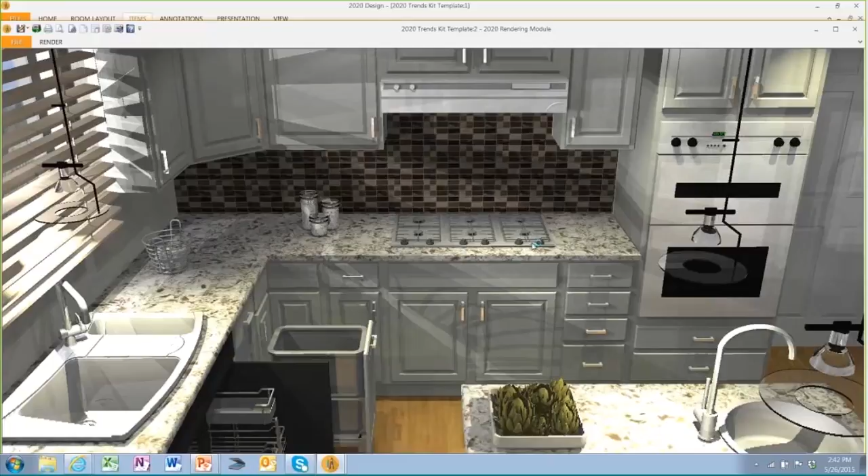Let's take a picture of it. Let's look at it. Because live engagement always excites a client. They love the fact that you can change it live. They feel like they're part of it, and they're actually making the decisions. They're picking the tile and seeing what it looks like live, whether it's from far away or whether I zoomed in on it and took a look at it.

Oops, a little bit too far there. I zoomed in on it and took a look at it. You know, we have the ability to create that type of image very, very, very quickly with them.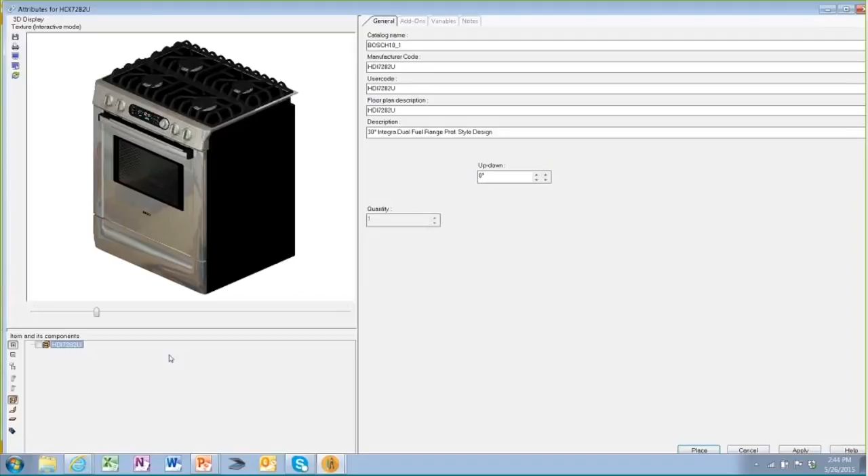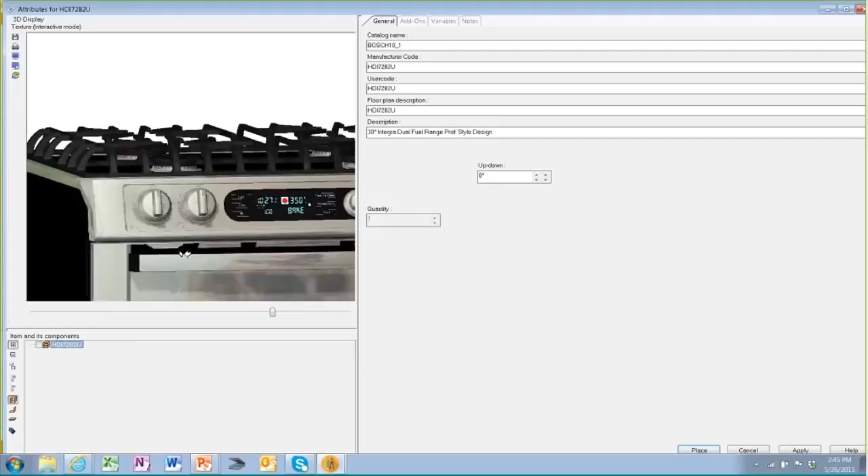Right now in my kitchen I have a fairly bland set of appliances. If I were really designing this for you, I would go through and help you select your appliances, and then do a zoomed-in view because I want to show you the detail on these appliances. Look at the imagery, the detail—I can tell you what time it is, what the cycle's set on, what the temperature is in the range. All of these things allow you to create the drawing that you need.

I highly recommend you do that, because one of the areas you get the most questions after the job is, 'I expected one thing with an appliance and this is what it looks like,' or 'this appliance sticks out further than I thought.' If we set the right expectations up front by using real materials, that makes us more profitable in the end because we're not having to accommodate customers after the fact when their expectation wasn't met.

Now let's jump back over to our trends, and go into what I think is my last trend today, which is focus on the user experience. In that, I'm going to highlight LED lighting. So much of the articles talk about contrast, lighting, shadowing, and ceilings that make you look up.

I'd like to take one more survey while I'm talking—I'd like to know how many of you use LED lighting in your CAD designs. It's just a yes or no question. I'll come back and read the results to you shortly. We've been doing this a couple years in 2020. I'm not sure what other CAD software does, but I have a feeling this is probably more of a 50-50 proposition than my other questions were.

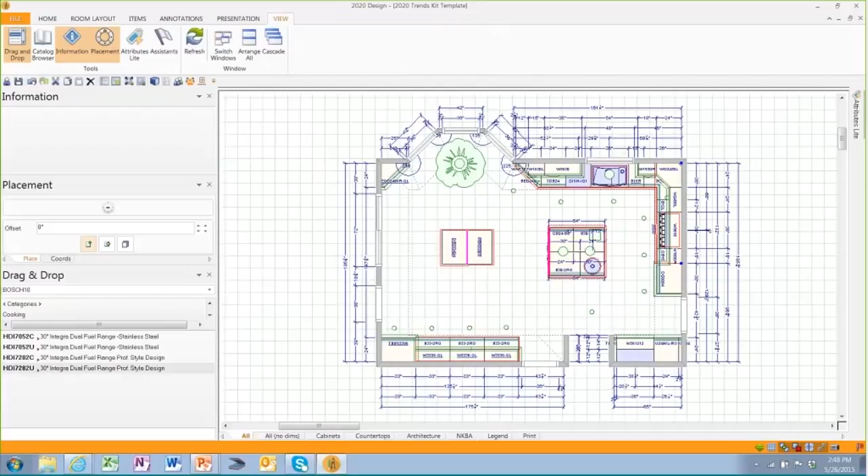Before I get to my Contact Us page, let me show you one more thing. We've got about 5 more minutes to go, and we'll end the webinar there, then I'll take your questions. First, let me come back to our lighting, close out of this, and open up another window. Hold on just one moment.

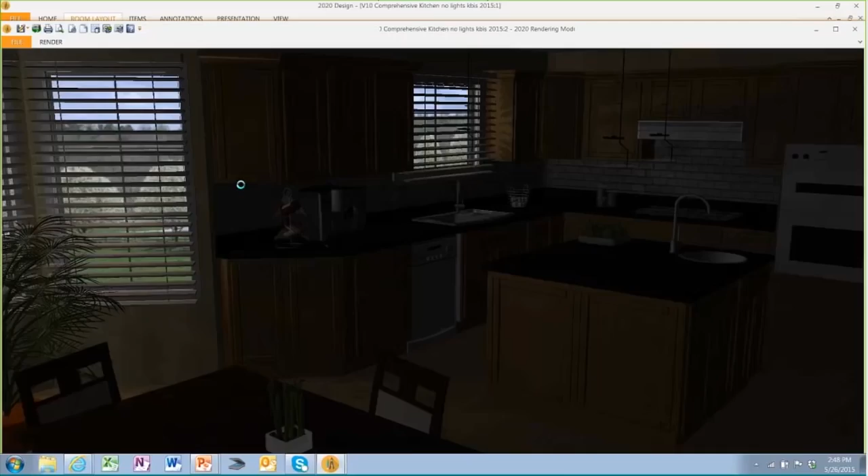Let me open up another design here. I'm going into the 'with no lights' design. This room is one where I've removed all the lighting. If you give it a moment to build, you'll see I have a dark room. I've turned out all the lights so I'd have the ability to show what it looks like as I add lighting to a room. Now I'm going to use simple under-cabinet lighting to begin with.

The trend in the industry is LED lighting. Your client is seeing this everywhere. They're asking you about LED lighting, but all they know is that it's hot and popular — they don't actually know what it looks like. That's why they're talking to you, and you as a designer need to help them have the right expectations for LED lighting.

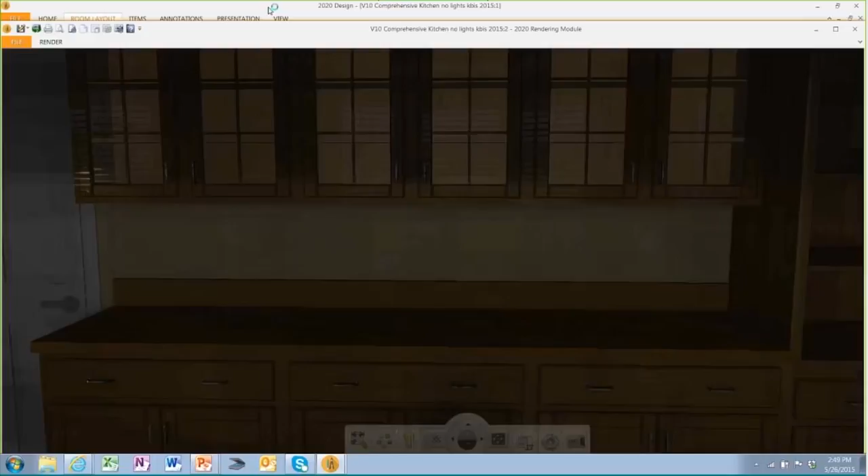If you're a 2020 user, you can simply go up to the tab called Items and click on Lighting Wizard. Remember the question I had before about why the countertop wizard was gray? It's because you haven't downloaded the catalog. Same answer here — why is your lighting catalog or lighting feature gray? It's because you haven't downloaded the catalog yet. So make sure you go to 2020.net and do that.

Hold on one more time, I just got a message. Here are the results on lighting: approximately 40%, just a little under, of you do use lighting in your drawings, and 60% don't. So 6 out of 10 of you working with your client aren't setting the right expectations for how lighting is going to appear in the room.

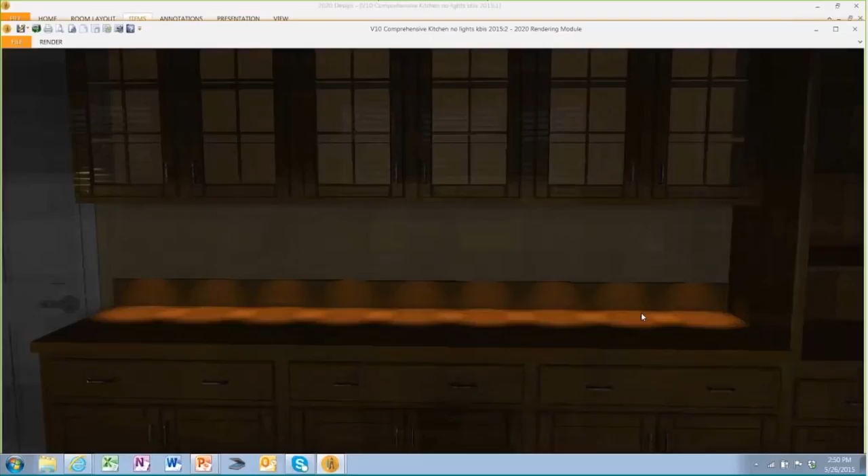As it renders, you'll see it cleans it up, but notice all the little circles. I can expand how far apart the lights are to have fewer circles, but they're still there. Just like my friend in Virginia, if you haven't shown this to your client ahead of time, the first time they realize they hate all the little circles is when they're sitting in their completed kitchen — when they should be loving it, but instead they're focused on these circles on their countertops and how much they don't like it. These little lights could ruin the whole job to the point where they ask you to change them out, and now you're spending more money than needed to keep that customer happy.

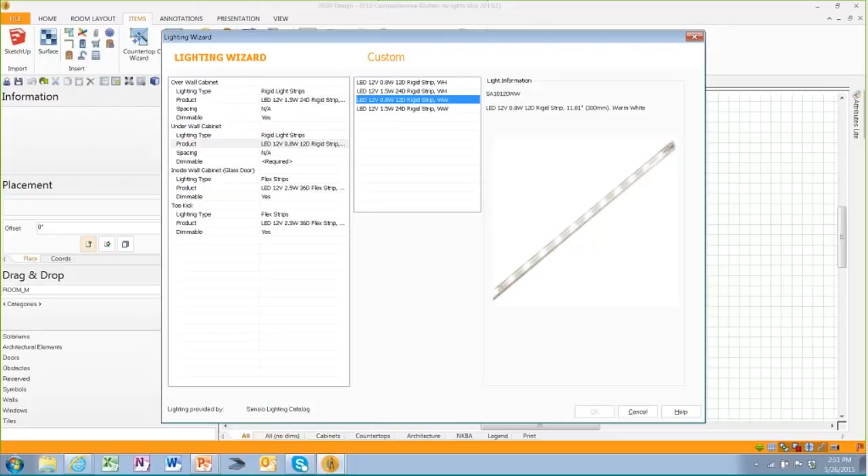If we had gone in and done the lighting up front with the client — let me hit undo and go back into Items, Lighting. I'm going to choose the premium option since we're running out of time, which includes over-cabinet lighting, under-cabinet lighting, inside wall cabinets, and toe kicks. Notice where it says under wall, it says puck — I'm going to change that to a rigid light strip. I'll choose the 12-volt, 0.8 watt, 300mm option, and spacing doesn't matter because it's a strip.

Dimmable, yes, I want it to be dimmable. And if I click OK, it's actually going to put LED lighting everywhere in my room, and I'll show you that in just a moment.

But most importantly, look underneath of my cabinets. I no longer have tiny circles. I have a more consistent lighting, and my customer understands what the difference is between puck and strips. And if I zoom back out a little bit, you'll notice that we've put lights above the cabinets, inside the cabinets. I've even put them in the toe kick.

If you look down here along the floor as it re-renders, see this little line right here? I'm actually standing on the other side of the window. I did not mean to go back quite that far. So we'll tilt it down and look at our floor, and you'll see that it's even putting lighting in on the floor. It'll eventually clean that up and make it look just as pretty as my gray kitchen did a second ago.

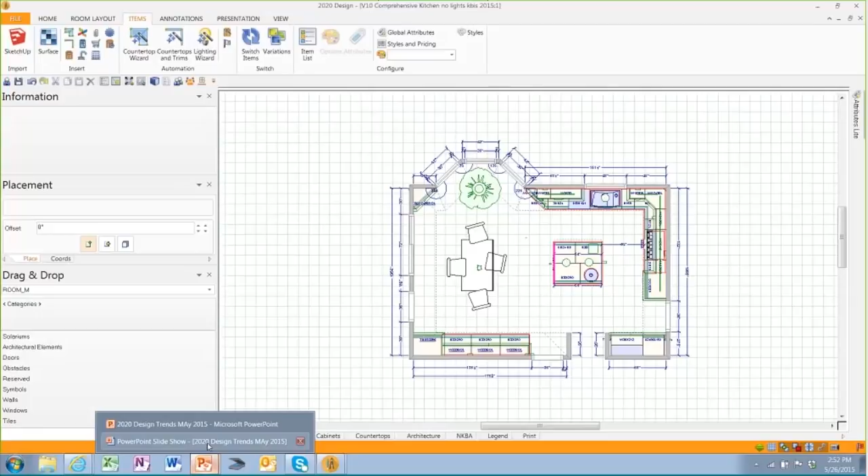Now let's go back over to our PowerPoint and let's wrap this up.